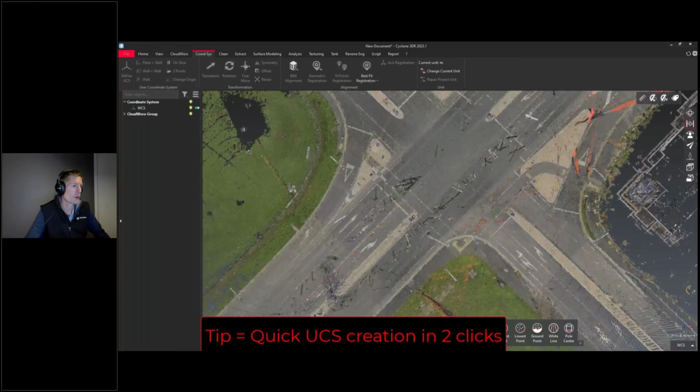Welcome in Cyclone 3DR environment, if you are not familiar. So here I'm working on a point cloud, that is from an LGS format. LGS is the Leica Geosystems point cloud format, really convenient to host a large amount of points, so you can work with a very heavy data set.

Immediately after the import of my point cloud, I always recommend to create a UCS. So here you have seen a 2-click, 2-point UCS creation. Even if later I decide to export my deliverable in another coordinate system, at least to work locally it's convenient. The next tip I recommend when I start a workflow is to create a limit box to focus on the area of interest. So here, this is the road intersection.

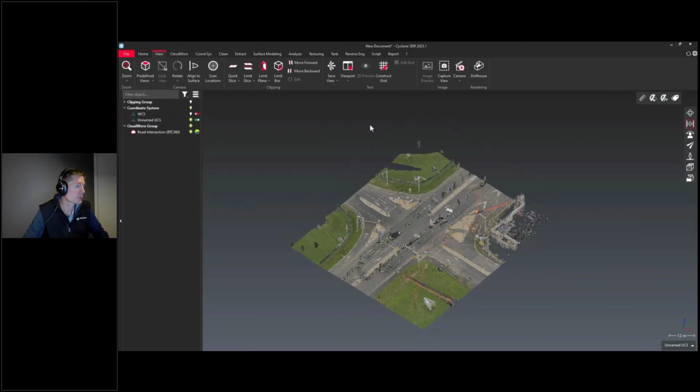It's also a recommended step to convert the large LGS point cloud into Cyclone 3DR point cloud structure. If you are familiar with Leica Geosystems environment, in the CloudWorks menu, I'm going to convert the projects. So here, for Virtual Surveyor, this is the feature that I will use. It's not mandatory to keep the entirety of the point cloud. In this example it really depends on the application, but to take my measures, my points directly on the point cloud, a 50 million point cloud was more than enough.

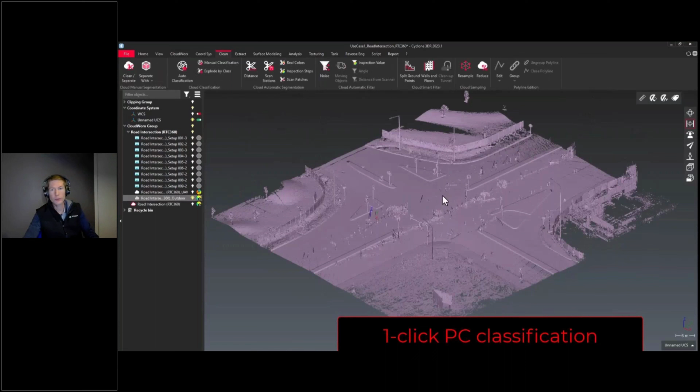Another important feature that I recommend to use for many applications, but in particular for Virtual Surveyor, is to use the one-click point cloud classification. The video is recorded, but what is important to know is that this operation to classify the point cloud remains a one-click operation. It might take a couple of hours to proceed, but it's a one-click operation and it's doable with a script.

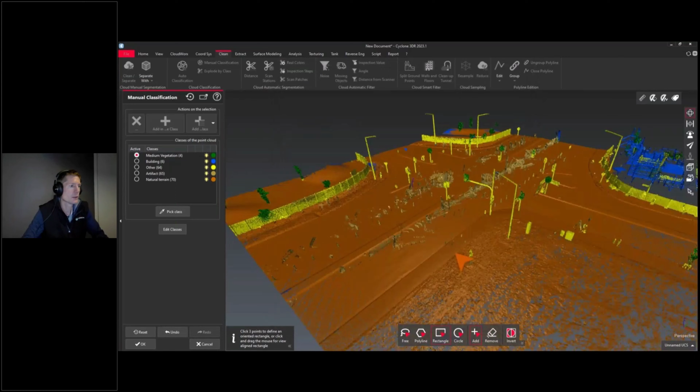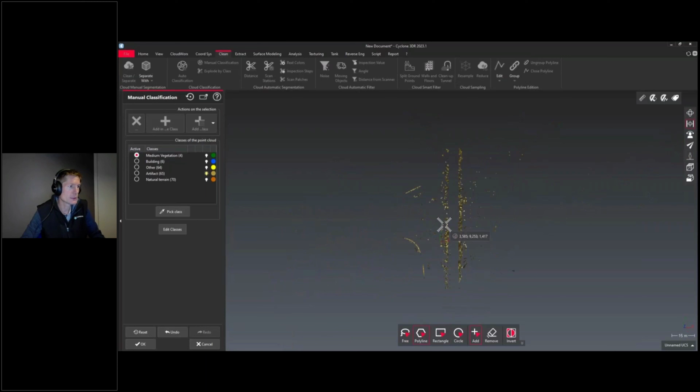Another strength of Cyclone 3DR is the capacity, in addition to finish the workflow after automatic tools, to work with manual user-friendly tools to finish the workflow. So here I just change the colors to have a better understanding of the context. If you are familiar with Cyclone 3DR manual tools, still manual but very appreciated and very popular among our community, the capacity to clean point cloud, just to select a group of points, clusters. It's very easy to rotate the scene, to define a fence, and just assign a new class.

In addition to the automatic classification, Cyclone 3DR is probably one of the single products in the market to also offer manual tools to deliver very refined deliverables. And here I have a very clean point cloud, clean and rich with the information of the classification.

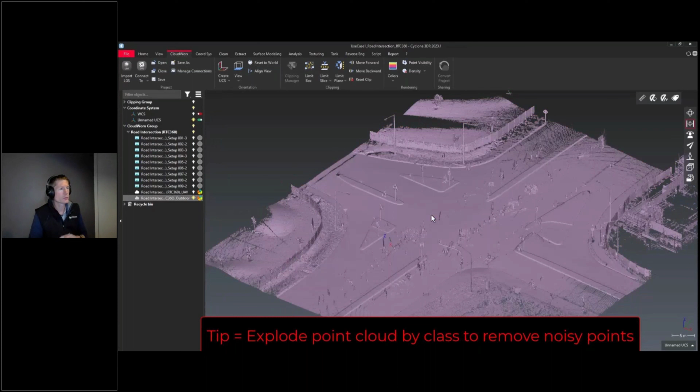To pursue the workflow, I also recommend to explode. It's another tip, to explode the point cloud by class. It's a way to remove in a very fast way the points that I don't want. So now I'm ready to work for my Virtual Surveyor operation. I don't have the noisy points, the moving objects. Also consider that classification, but also the capacity to explode and to remerge a point cloud removing some classes, is a feature that can be done in script.

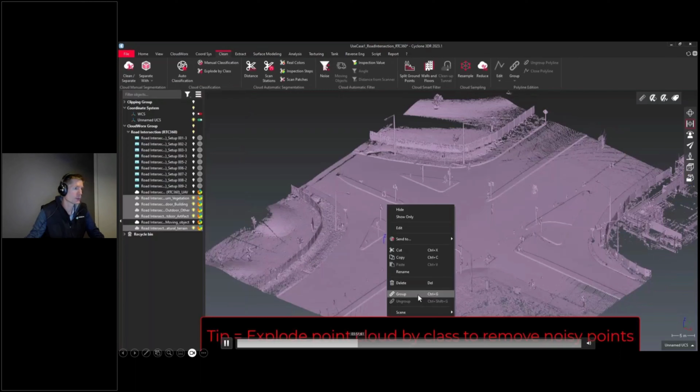And now in Virtual Surveyor, so I just started, let me just go back. So to start the Virtual Surveyor, I don't have to do a selection. I can work on any kind of data, mesh, point cloud, anything. So I just run Virtual Surveyor and I can work on my 3D environment.

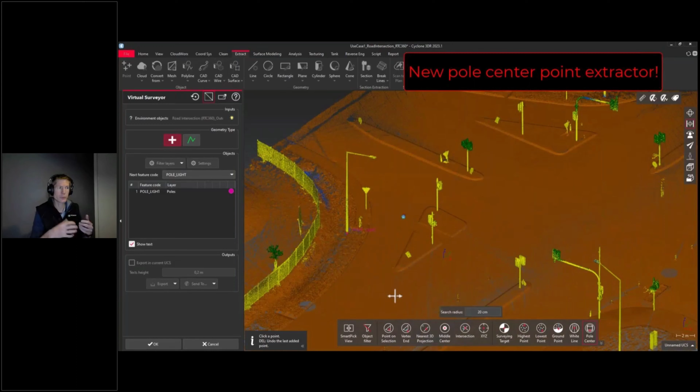First thing I would like to mention is the flexibility of the settings that we developed for our users. For example, if you have to create a road intersection plan for a specific municipality, you can load and prepare your own feature code standards. But if you have to do another job in another county, another city, another area, you can create different settings. So first thing to do is to prepare your settings.

And then what you can see here, this is a new feature. Among the point selection tools, the pole center is a feature. You just have to click in the middle of a pole to detect the middle projected on the DTM. This is really convenient, and which is nice, with this feature you don't have to be accurate when you click on the pole. Automatically, it detects the middle point projected on the ground.

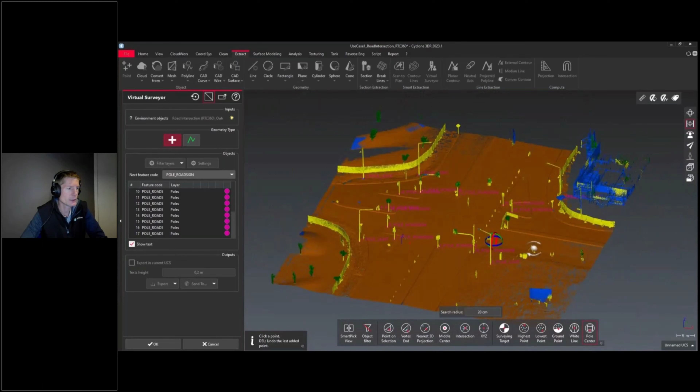And a funny story about this, this is feedback that Lennon shared with us when we shared a beta version of Virtual Surveyor earlier this year.

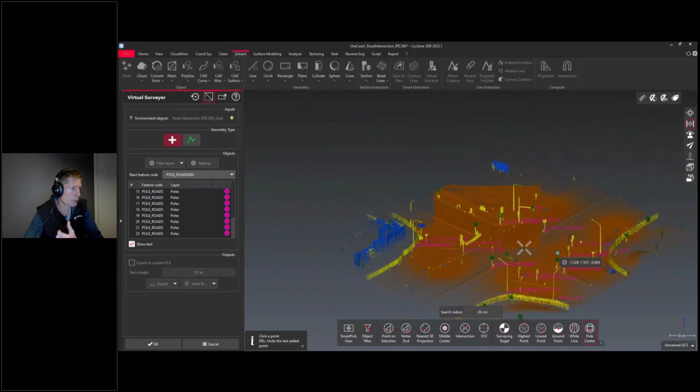That's a great tool. With my feature code, I can create points with feature code information, and I can decide to show or hide the text depending on the amount of information.

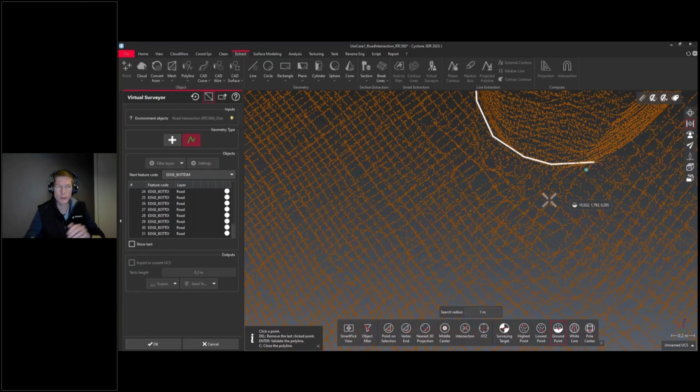In addition to the points, I can also create polylines directly in my 3D environment, and for each vertex, for each point, I'm able to extract a feature code.

This information at the end can be exported in proper layers in a DXF format, for example. So to extract the edge of this road, I can use multiple point selection, using pole center for the poles. Here I'm doing a demo with the ground point, which is projected on the DTM. Another solution is to use our lowest point capacity, which is really convenient for edges and to detect various borders.

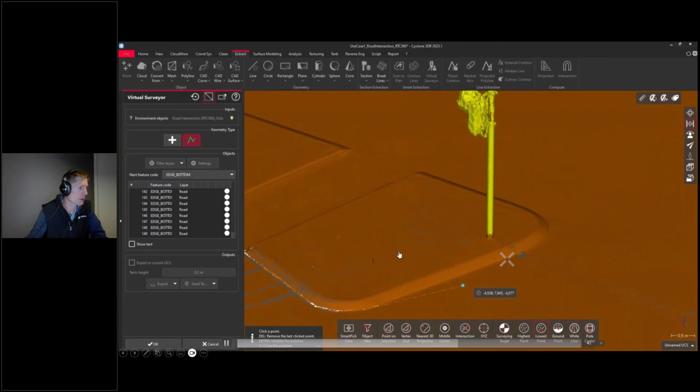You can see on the left part of the screen I have a complete project that is filled. It's possible later to change the colors, assign to a new layer, rename, or remove. There's also a copy-paste possibility that's not part of this demo.

It's possible to quit the workflow, save your project, and go back into your Virtual Surveyor project if you need to finish your job later.

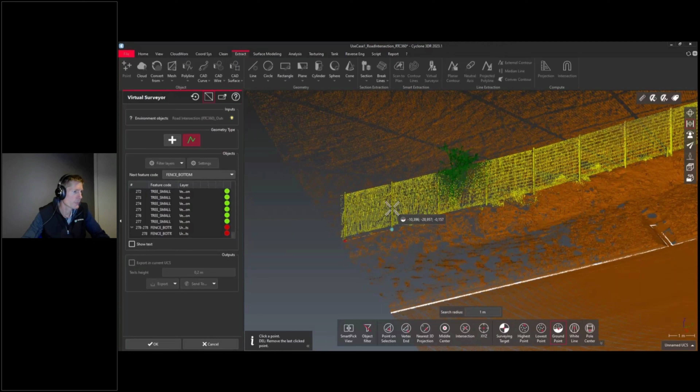This is another layer I'm building for my fence here, and you can see that the classification representation is really convenient to visualize each column of this fence. Very easy to have a feature code for each fence and a very detailed deliverable from it.

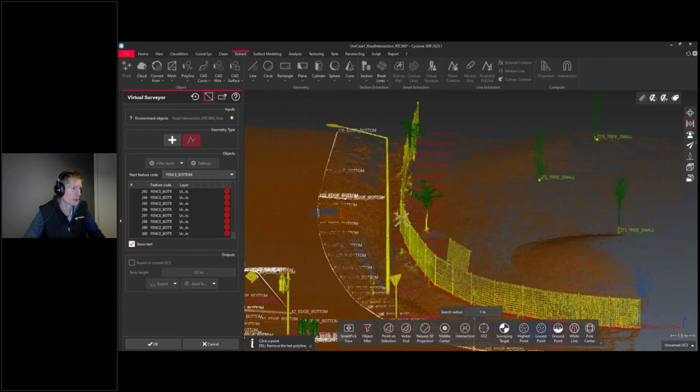My feeling is with the point cloud and representation of Cyclone 3DR, it's even better than real colors in this situation. So I mentioned that it's possible...

Yes, I'm just showing the work in progress. I extracted the poles, various lines. I can quit the command and decide to change the representation.

Maybe a little teaser for what's coming next year in Cyclone 3DR: in addition to the point cloud representation, Virtual Surveyor will be a good workflow to also use the images from the laser scanner.

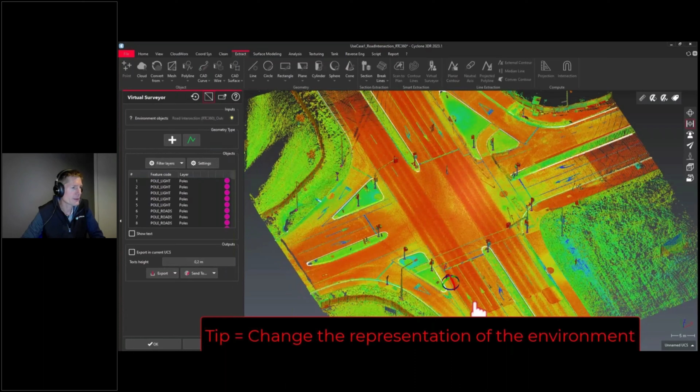Just a small teaser. I decided to switch the point cloud representation from classification to intensity to identify the various road marks on the road.

Here again, I can use points that are projected on the ground thanks to the ground point, or I can use the lowest point in this situation.

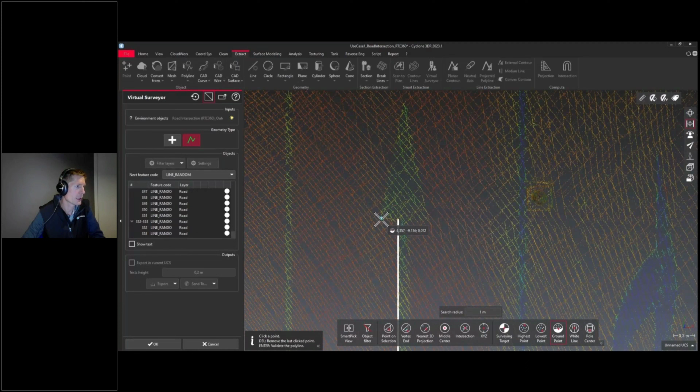Pretty easy thanks to the intensity value, and there's a shortcut with the keyboard, the letter C, to close the polyline in one click and save a little time.

So that was the example of the arrows, and for this triangle road sign, also very fast to extract with the shortcut we have in Cyclone 3DR.

I think my extraction is almost done. Maybe, okay, let's see a final extraction of furniture in the street.

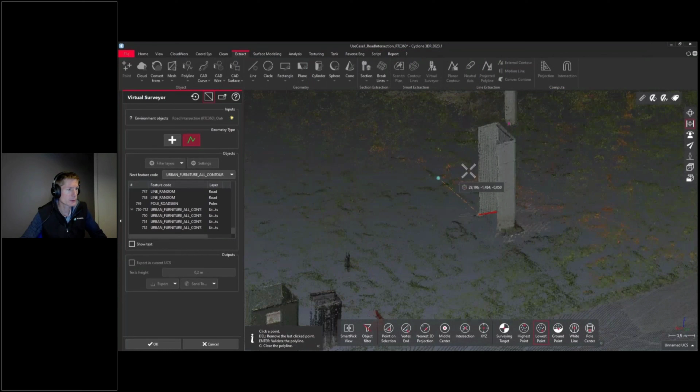It's really up to you - you can customize the settings to host as many and as various layers and kinds of information as possible, depending on your customers, the final company or engineering firm that will use the deliverable.

It can be, I mean, I got this map that I can export to DXF as an example. We also have a direct export to AutoCAD and to BricsCAD. Hexagon BricsCAD is also a CAD product from Hexagon.

So this is in BricsCAD, and here we are for the road intersection extraction, with all the information and the feature code that you can also export to a CSV list.

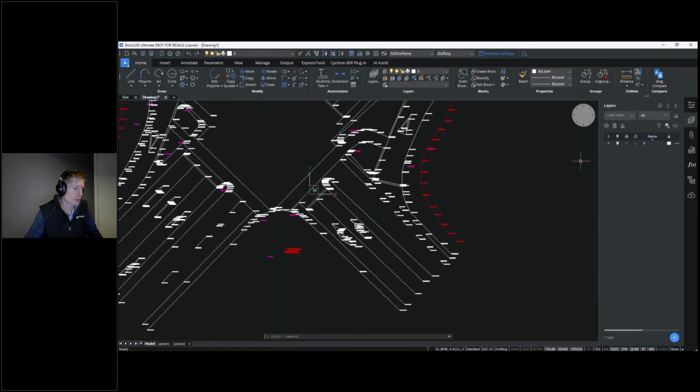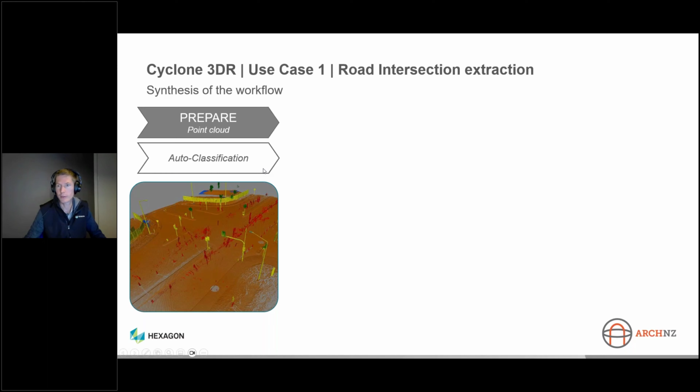So back to summarizing the workflow: I demonstrated a few tips, the automatic classification that can be done with a script, with no user interaction, which is really convenient and ideal to prepare your data and then execute your Virtual Surveyor operation.

This is a feature we released this year. At the end, you can deliver to many applications, and 12D is a CAD software application that can also be used to consume the deliverable from Cyclone 3DR.

Virtual Surveyor exposes various manual extraction features. I'd like to highlight more automated ways to extract operations - we have a predefined script in Cyclone 3DR, the kerb extraction, which I think is the most popular favorite script in Cyclone 3DR.

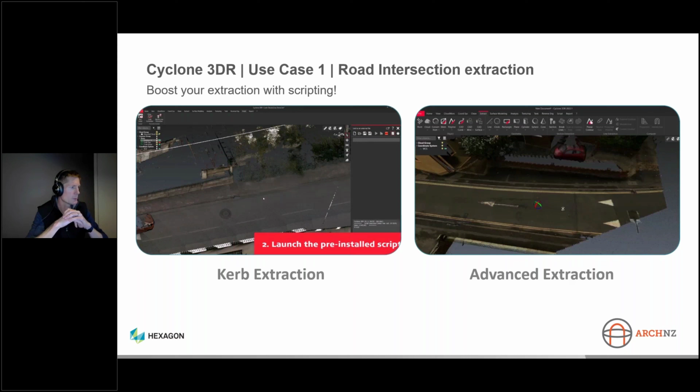So it's been part of Cyclone 3DR since the first release. I think this video is 4 years old, but still it's a very popular feature to extract edges. Please note that with our very recent script engine, the kerb extraction feature is now 20 times faster since April.

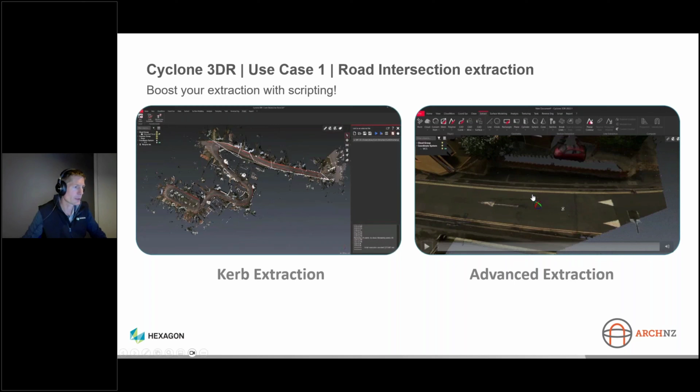Cyclone 3DR is an advanced solution with multiple ways to extract information. You can see in this video the capacity to filter the data with the RGB colors, to filter the data with intensity, use the inspection steps tool, the possibility to explode the data into clusters, and also use various tools like line extraction to detect the center line of road marks in this situation.

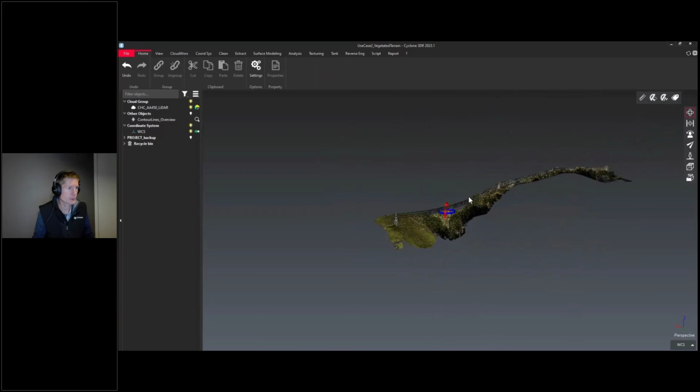With the point cloud coming from an aerial LiDAR scan - this is a dataset that Lennon gave me, and I really had fun, so thank you Lennon - I will start this workflow with a DTM. Maybe not the most important part of what I would like to do for this workflow, but still, I think it's always good to test the DTM feature in Cyclone 3DR for an outdoor application.

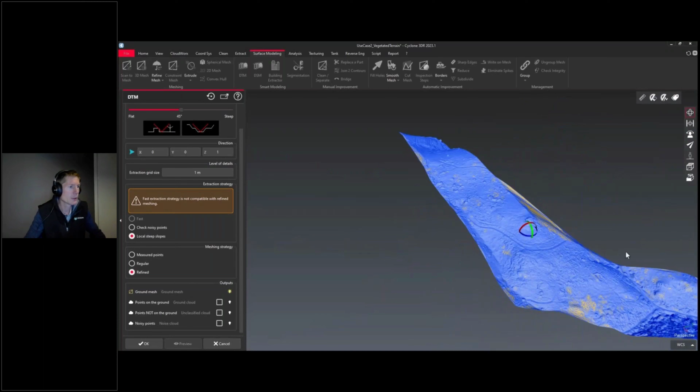As you can see, it's pretty easy to use. I just kept the default parameters and adjusted the size of the grid by 1 meter - this is basically the resolution of my surface model. And my terrain model now, you can see the time of computation is live here for the DTM. So it's very fast and very easy to process, even for reality capture beginners.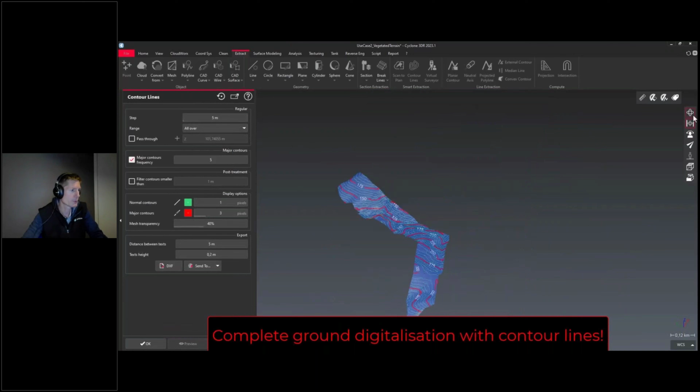Another very important piece of information that you can extract from an outdoor dataset and from a DTM are the contour lines. Again, contour lines is also a very simple feature to use. Based on the DTM, I kept my parameters and already extracted contour lines - it's automatic and very fast to extract. Just adjusting some parameters to have the good step for my final deliverable. Here I'm satisfied. I would like to highlight that DTM contour lines are very easy to proceed and a good way to understand the context.

Let's get back to the point cloud. Here you can see I have electric lines, and I would like to do a clearance verification. First of all, I will use our favorite script for line extraction, which is part of the product. So I need my point cloud - I changed the representation just for the purpose of visualization. This is a predefined script, and it's up to you if you want to adjust some parameter.

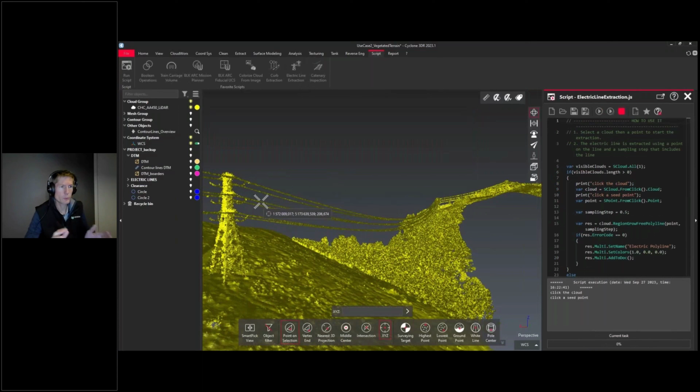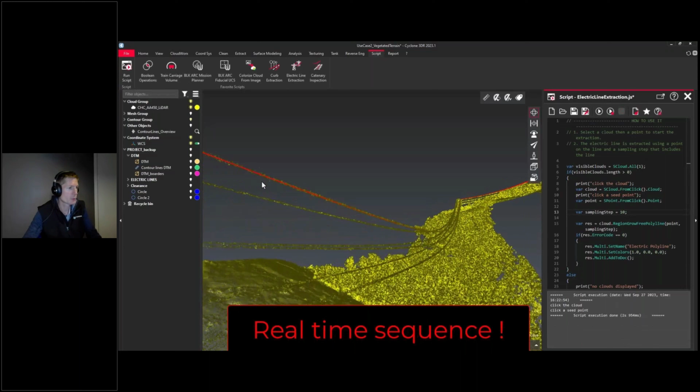One tip: if you need to go into this script, this is the only parameter you may want to change - basically the step of the polylines that I will extract. One click to select my point cloud, one click to have a seed point to extract my polyline, and I'm just repeating the task for the six lines. It's real time, efficient, and reliable - that's a script we are proud of, and you can see that the extraction of the 6 electric lines is so easy.

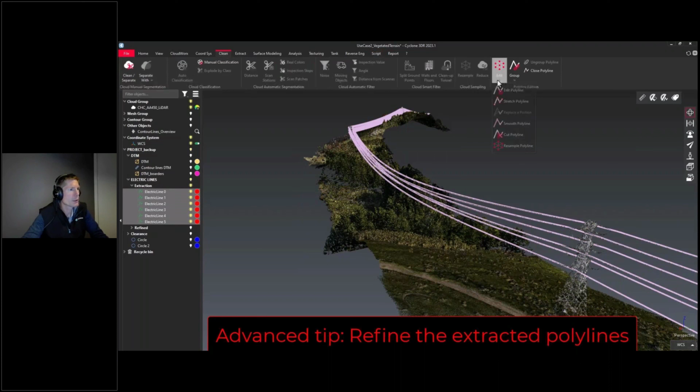To go further, maybe a couple of features I'd like to show. First, you can see I can change the visibility settings of my polylines, using features like resampling polyline and smoothing to get the most realistic lines from my first extraction. It's not mandatory for this workflow, but it's a bonus way to get the most realistic electric lines.

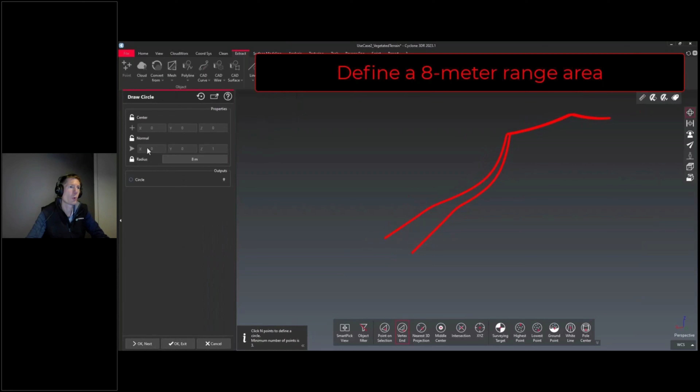Now that I've done this extraction, I'm focusing on the 2 bottom ones, the ones close to the vegetation. So first, to create my 8-meter clearance area, I'm just creating a circle, thanks to the modeling tool of Cyclone 3DR, at the beginning of the first polyline, pointing the center, a direction, and repeating the task for the second line. Then we have extrude along a path.

This creates a mesh, an object along a path, in this case one of the 2 electric lines. I can also close the objects. So here I extracted, and now I have a volume, and I want to check inside this volume where the vegetation, the trees that impact my clearance control, are.

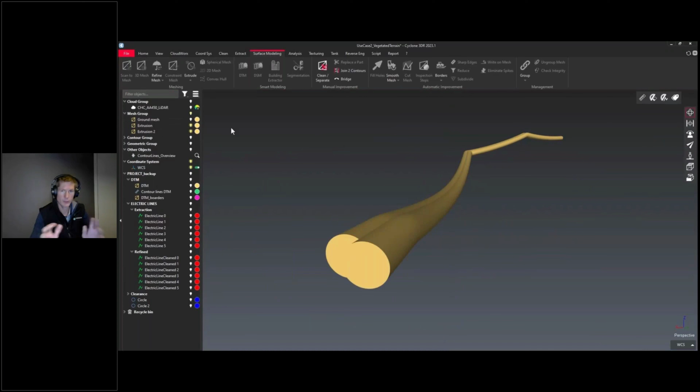Before that, I just have to merge the two volumes, and for that we have another Boolean operation script, which is also very fast to use. Just selecting the 2 meshes, and choosing the strategy to merge the 2 volumes together.

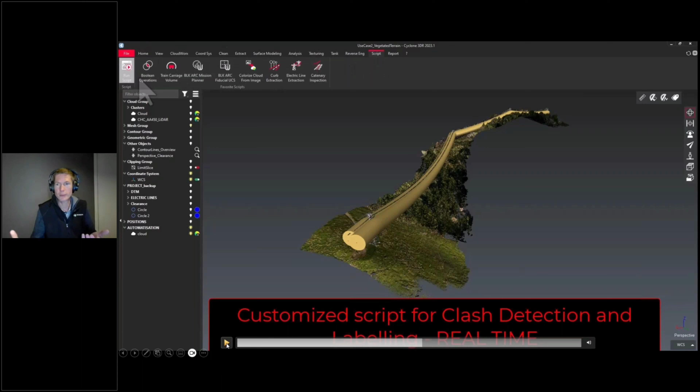Now I'm ready to do the clearance verification with Python code, and here I'll just make a pause. You're going to see in 20 seconds the results of a script, which I'll describe after the demo, to really show you that you can create your own script to save time and get robust results for your repetitive tasks.

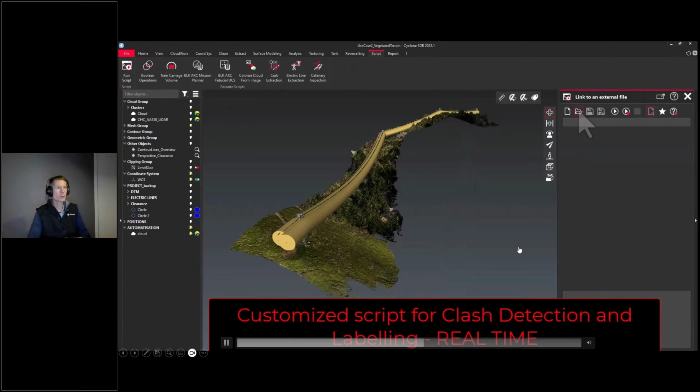So I created this JavaScript file. I just have to connect, and I'm playing it. What I'm doing takes 2 seconds to keep only the points inside my volume, and the support of the point cloud is split into clusters. For each cluster, I was able to get a coordinate label XY in this case, but I could also add the altitude.

Everything happened in 5 seconds with the script. This is what is magic about scripts. Just to show you a piece of what you can do, but you can even do more.

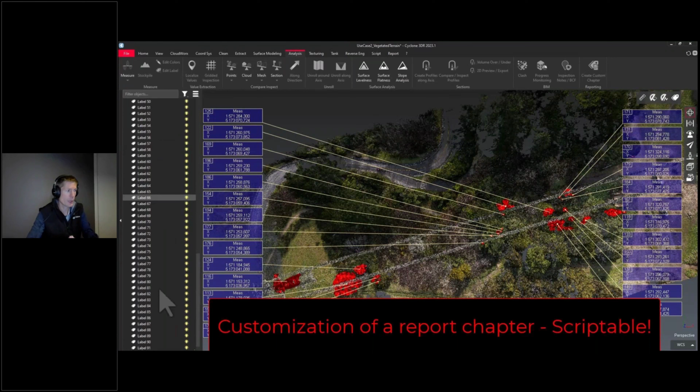Here, what I'm doing is creating a customized report chapter. In this report chapter, I'll have all the coordinate information for each of the clusters. I can also decide to create various view sets to enrich my reports. The purpose is to get, in this case, a PDF report I can share with my customer, the owner of my electric network.

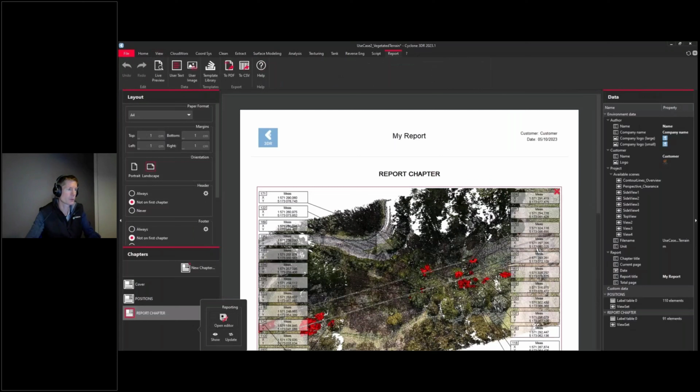This reporting part, the creation of a report chapter, the collection of view sets, and gathering all the values to PDF or CSV can also be done in script. But here I'm showing this in the Cyclone 3DR user interface, and it's pretty easy to add the view set I created. You can customize the background, the scale, etc.

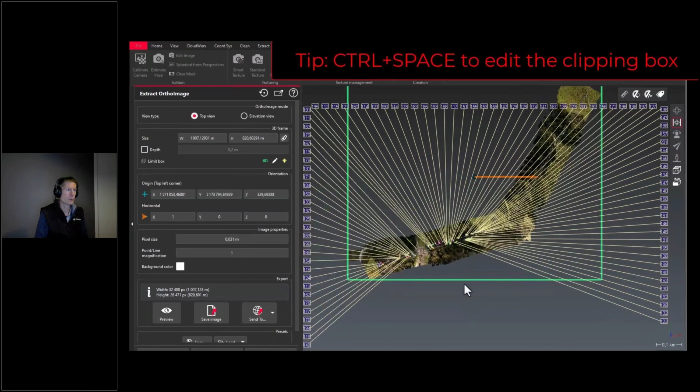Another way to deliver this information to the end user is to use ortho images, and this is what I'm going to do here, using the extract ortho image tool. So I have my top view representation with my clusters, the XY labels for each cluster. Then I just have to define an area of interest. There are parameters to adjust the number of pixels, the size, the background.

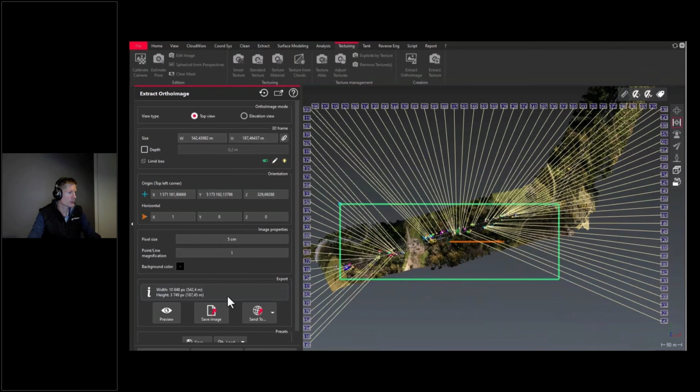You can also load this kind of settings, saving and loading your own settings. So in addition to the PDF or CSV exports, another kind of deliverable really useful for this application is to get an ortho image with all the labels, the X and Y coordinates of each cluster.

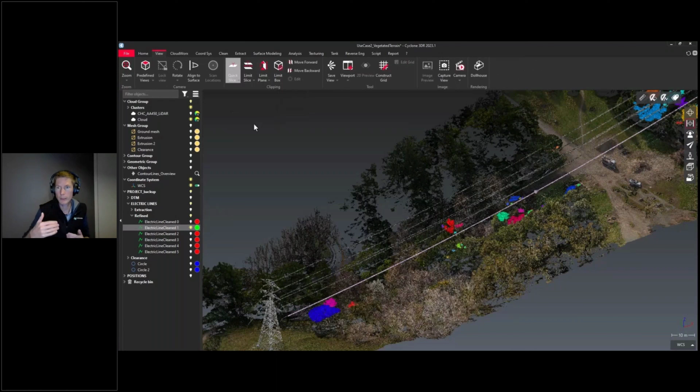A final tip, another way to understand the context here. I'm selecting one polyline, and from it, creating a slice along this polyline. What I'd like to do is review my vegetation clearance along this path. So I created this slice, and I can also edit it, renaming it, editing its depth and the step.

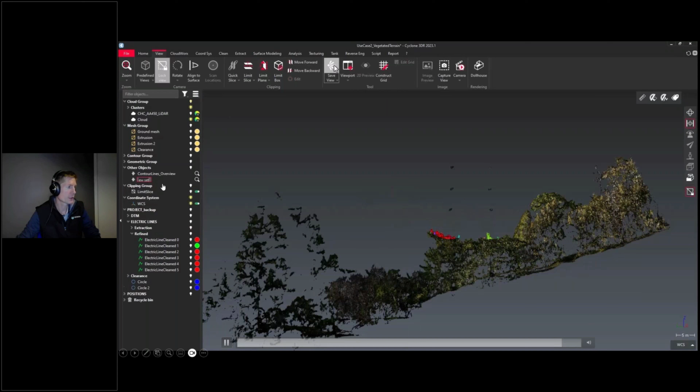Because it will be possible for me to visualize along this slice, and with the recent small improvements we released, it's really convenient. So I'm selecting the slice, using the lock view feature, a tip to lock the view along this slice, and using the Control plus Scroll shortcut while maintaining the selection of the limit slice, I can go along my axis, my path, and visualize and see where the issues are.

I can then create more view sets. I could also add and keep some label information to make my report even more complete. And then I generated this PDF, and coordinates can also be exported to CSV.

So a short summary of the workflow. DTM, contour lines - for me those are basic tools for survey outdoor application of Cyclone 3DR. Very easy to use, easy to understand the reality, and it will be used again in the next workflow.

Then for this advanced extraction, I did a kind of clash detection operation that I'm going to describe in detail. Finally, I was able to export in various ways the information about where are the clusters, where are the locations of the impact of the trees with this electric line. Really convenient for the maintenance of power lines. So I can export to ortho image, but also I can create PDF reports, CSV tables.

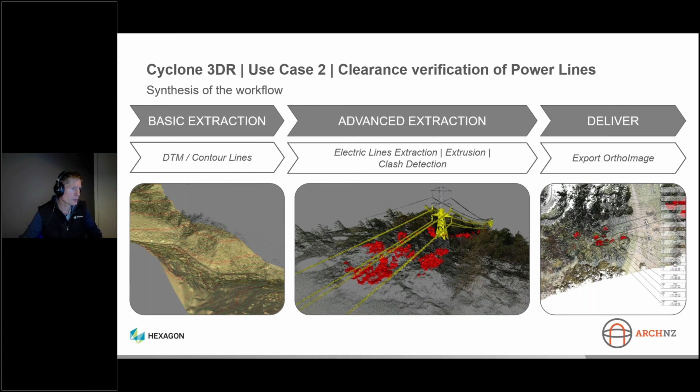So let's jump into the clash detection script that I created. My goal here is to show you that even someone who is not a software developer or who doesn't have computer skills can do very nice stuff. And this is the guy I am.

So we have - and I will point to this page again at the end - a very nice documentation. It is online, it is public, describing the API of Cyclone 3DR scripting. This is where you can find all the information.

So to start this piece of script, I used this iCloud.separatePoly function. Everything is described in the API documentation with examples - what are the inputs, what kind of outputs are returned from this function.

My goal here is to split and to detect the points that are inside the clearance area, so to split the point cloud into parts, with a mesh as a reference. This is a function that I will execute at the end of my script.

So I picked from the documentation this existing function, and I just have to set a name for my output, to add it to the document, the 3DR project, and just keep but hide my input mesh and my input point cloud. So this is the first step of the clash detection script.

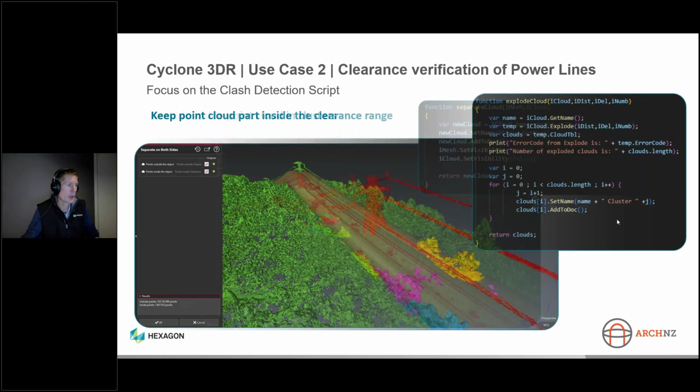And then the next step, I want to create clusters from it. So this is the explode iCloud.explode function that I found in the documentation. I just have to provide a cloud as an input, and then some parameters like the distance between two clusters, and the maximum number of clusters - I did just one test, but 200 was good enough for this use case.

And then the last step of this script is to extract for each cluster the label, the X and Y coordinates of the centroid of each cluster. So the get bounding box feature is exposed in the script API.

Actually, this is not a feature that is part of Cyclone3DR user interface, but you can get this conceptual object for any kind of object in Cyclone3DR thanks to scripting. And then it's a basic mathematical operation to get the centroid. So this is the extraction part of the centroid.

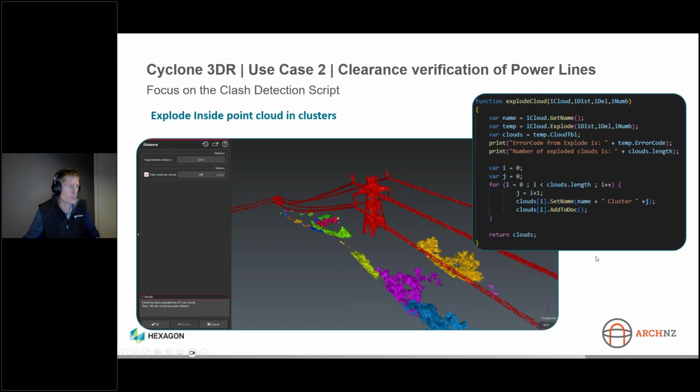Just to show you that I didn't build the perfect script here - that was not the purpose. My purpose is to save time when I repeat tasks. So I did this line to just hide, to remove the biggest point cloud before the extraction of all the centroids and the coordinates.

A software developer, someone with computer science skills, could do better. But really, here I want to point out that you don't have to deliver the perfect script, and it can be a tool that you can be familiar with, that you can reuse for your tasks. For me, that was more than okay to get my deliverable.

And if I have to do it again, maybe it will be okay - I know I created the script, and maybe I can also add instructions in my script as well, if one of my colleagues wants to use it.

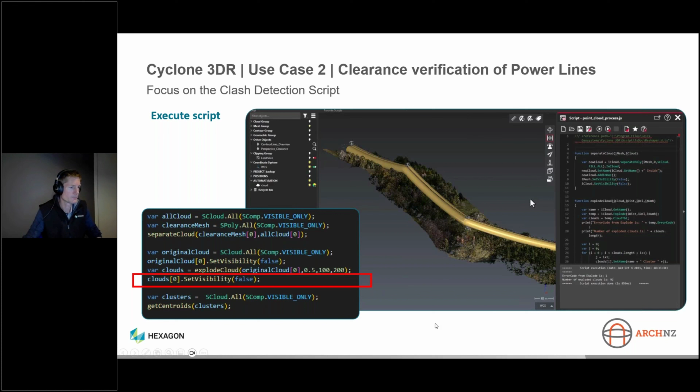Okay, let's jump into the final use case: monitoring a civil construction site. This is another dataset that Lennon shared with me from photogrammetry, and again I'm starting this workflow with a DTM, just having an overview of this point cloud.

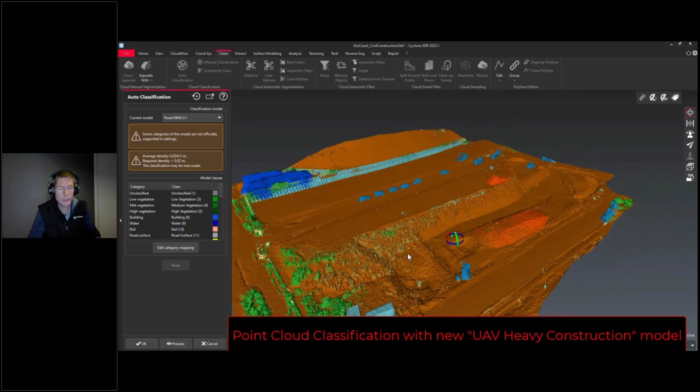But before executing a DTM, what I'm doing is a classification. We have four models: outdoor generic, indoor generic, construction sites, and heavy construction, trained with UAV dataset. So this is the one that I'm using.

Here, using the capacity to explode a point cloud by class, it's an easy way for me to remove parts I don't want, like buildings, vehicles, for example, and to keep only the natural components of this point cloud, to be able later in my DTM to use more advanced parameters.

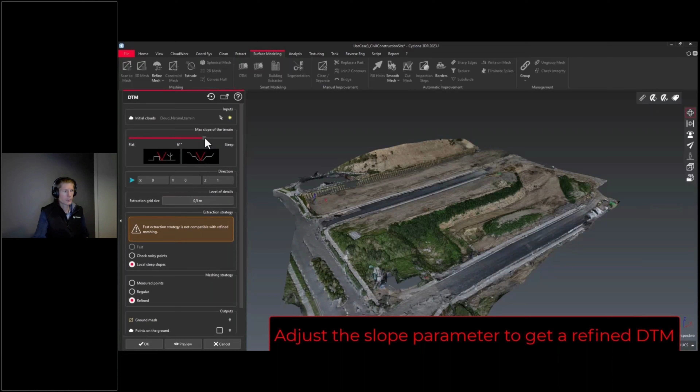It's a way to get the most refined DTM. I could also use meshing features, but this one I think is a modern and easy way to get a refined DTM with classification. You don't have to jump into too complex parameters in meshing, but it's a very good way, so I can be optimistic in my slope parameter here to get a refined, realistic DTM.

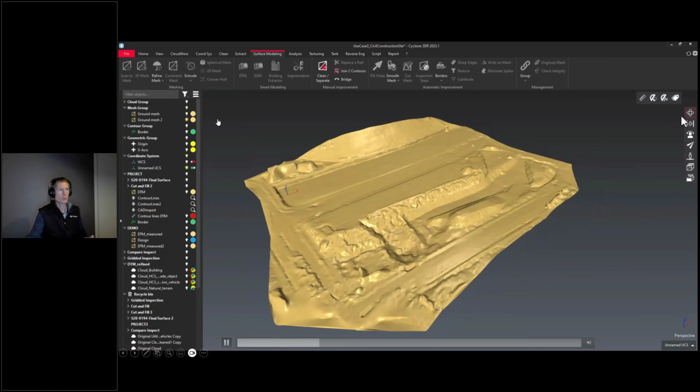So here I'm going to point on this area. This is the edge of the terrain that is maintained in my DTM operation. I use the classification to get this level of detail.

So I imported the design of my work site. I didn't like it in green, so I decided to change it to a transparent blue one, just to show you that any kind of object you can play with the representation for your own convenience.

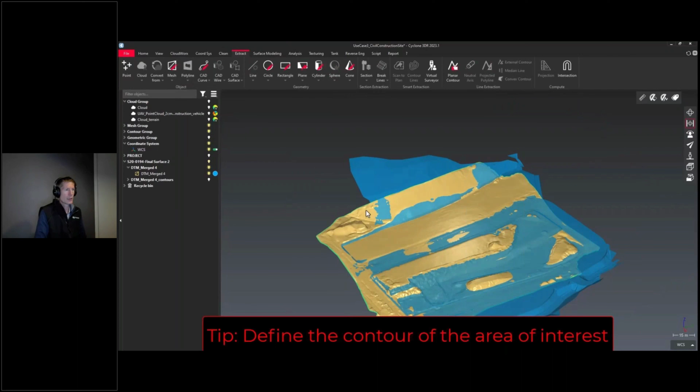And now I'm going to do a cut and fill operation, but prior to this I'd like to just have a contour. I'm extracting a contour of my DTM to really focus on the area of interest.

So I can use the Cyclone 3DR meshing advanced tool to keep only the area of interest, and I'll keep this part of the design model, my mesh.

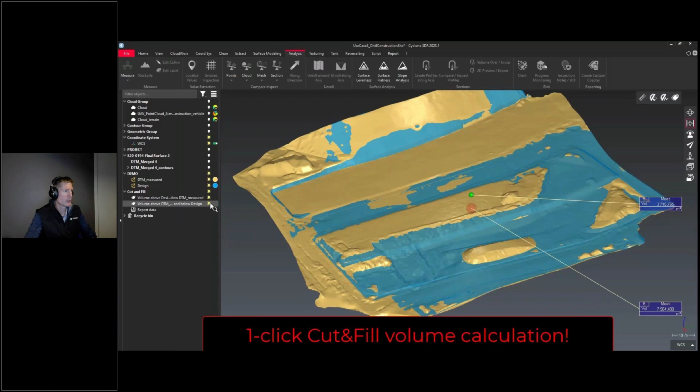So it's going fast. Cut and fill, you can see it's going very fast. I just select the design, the measured model, and it's a one-click operation to get the over/under volumes. And that's it. And I have a report that's automatically filled.

I will come back to that, but before watching the reports, I can also bring more context with the creation of a color map, using the comparison between the two meshes.

Here we have predefined color gradients, so I can really visualize the over/under parts between the situation of the work site, my DTM, and the target, the design target. This is a CAD model.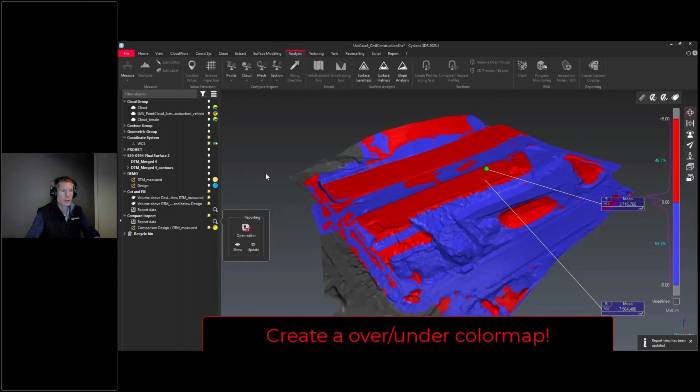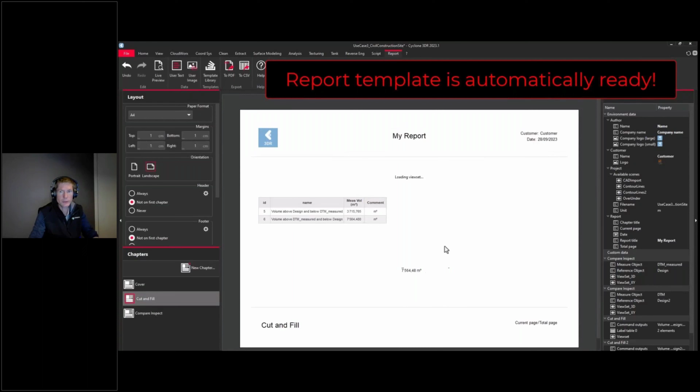I can show again the volumes, update my view sets, and now jump into the report editor. This is typical for Cyclone 3DR analysis features. Automatically the report chapters are filled, and then you can customize, change your own template as well, but it's very fast.

I'd also like to show you graded inspection. This is another way to deliver information and values from an inspection. It works on inspected surfaces, like this colorized color map.

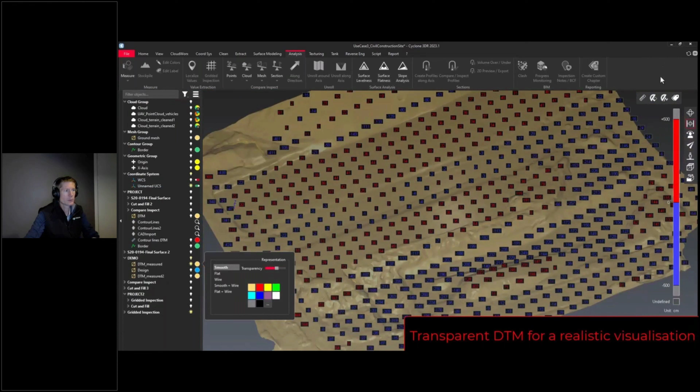I'm just changing some parameters. So on a grid, I can get the difference, the deviation between the reality, the DTM, and the CAD. I define the step, those are values in centimeters, but this is another way to understand the context — okay, here I have 2 meters to fill, etc.

Just before that, this grid can also be exported to DXF with the colors, and also sent to AutoCAD. And the final part of this use case is the creation of a raster.

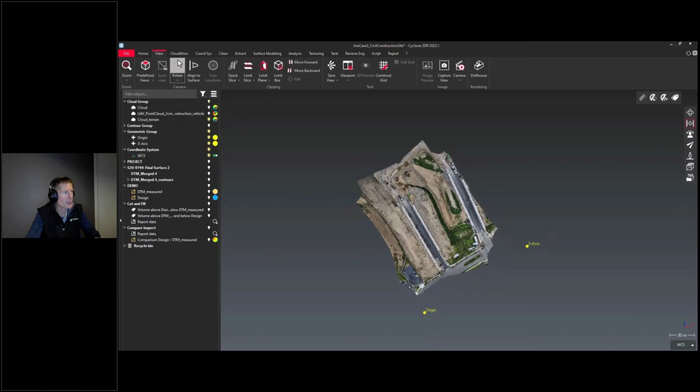It can work on a point cloud or on a mesh. This is another one that was really pushed by Lennon, and I'm really happy to say that we released this script on our GitHub three weeks ago. If you're a Cyclone 3DR user, it's public, it's free, and now on GitHub.

The purpose is to get a raster to a CSV format or ASCII format off a point cloud, with altitude information, and we have various options, including the lowest point or the highest point.

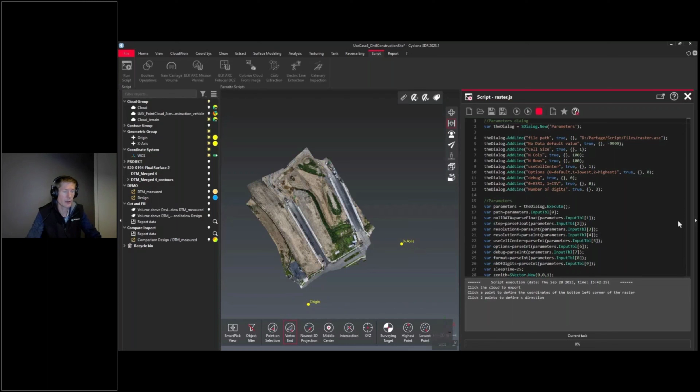I prepared an origin and axis for the purpose of the demo, but it's not mandatory. From this raster script, now on GitHub, you can see that I extracted this CSV spreadsheet with the altitude of my terrain, arranged in columns and rows.

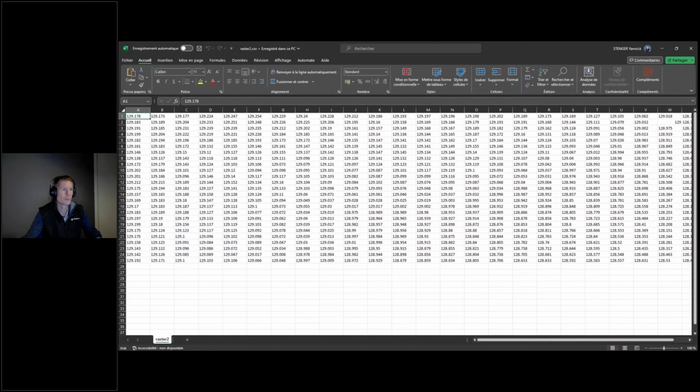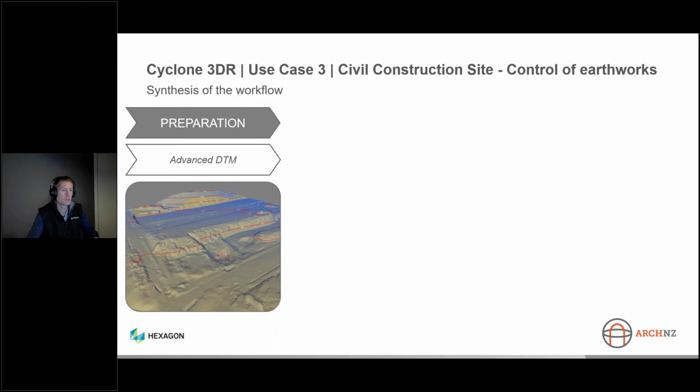So let me summarize this final use case. DTM, very important for many outdoor workflows, and advanced DTM, multiple ways. I think we have a very good one on our YouTube channel that I encourage you to watch. For this one, I used the classification to clean very easily the data, the noisy points, or at least the non-natural ones, to get the most refined model in a very easy way.

And then the cut and fill operation, very easy, very fast as well. The video was fast, but it was a real-time extraction. The difference of calculation between the two surfaces is a very fast operation in Cyclone 3DR.

And then another way to get the most of your reality capture data, it's now the new raster export script that is online on GitHub.

So before concluding and eventually replying to various questions, I would like to remind you of the updates about scripting. I mentioned this earlier, that in the April release, we delivered a new engine. Maybe this is not a lot for you, users of our products, but that was a big effort to modernize it. One of the very nice benefits is the acceleration.

It really depends. The comparison with before depends on how the script is built. But as an example, the script of the curb extraction is 20 times faster. So I encourage you to test it.

And the documentation is modernized, easy to use. You find all these kinds of links. Maybe we can share them with you later after the webinar. On the official site of Cyclone 3DR, you can find also this documentation. There is a link from the Help Documentation Center, so easy to find.

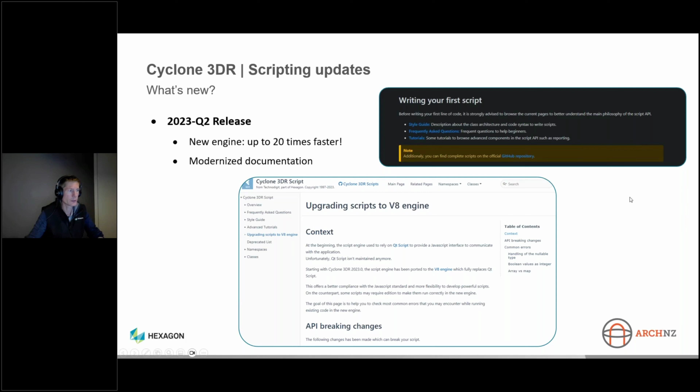More recently, we have been very active on socials. I don't want to talk only about my LinkedIn posts, but you can have a look and you will find very interesting information. We released a new YouTube playlist dedicated to scripting, so there are nice use cases. Have a look, please, if you are interested.

The GitHub page that is free and public was enriched with the raster, but also a nurbs embedment script that we created earlier this year. You can find also some articles, other use cases and latest updates, and also an interview with a partner from Canada that created nice scripts for his customers in North America. Please have a look.

And also about what's coming next for the scripting ecosystem. This is a very cool improvement: it will be possible to create your own dialogue from scripts.

Maybe if you are behind the code, that is not what is important for you, but for the end users that will use the scripts, for your colleagues, it will be much more user friendly. For the ones who will do the code, it's pretty easy to do. It's a new feature, very well documented. There are many various features that you can add: images, various choices, tooltips. I created this one myself, and I'm not a software developer, so it works very nicely.

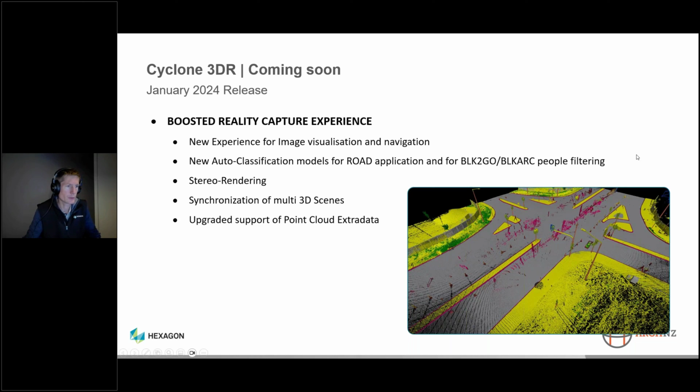In addition to the generic improvements for 3DR, I'd like to focus on various industry features. For the survey application, we have a big modernization of the experience to extract profiles and analyze them for road and tunnel applications, with a guided workflow to make it more user-friendly and get rid of known issues. It's a very modernized experience, and a nice feature is the capacity to import trajectories from Leica sensors like TRK and BLK.

For TRK, in addition to the new object trajectory, there are about 10 new script functions. It will be possible to do automated extraction of large datasets on LGS point clouds with scripts, making this kind of workflow even more powerful.

A quick word for the AEC industry. This is a permanent improvement area, and we're doing our best to make Cyclone 3DR more and more BIM friendly. Progress monitoring, released last year, is improved with more detailed screenshots for each object in the reports. The purpose of progress monitoring is to create a progress status report, not deviation analysis, but really to compare an IFC and a scan and track the progress of a project, including classification information.

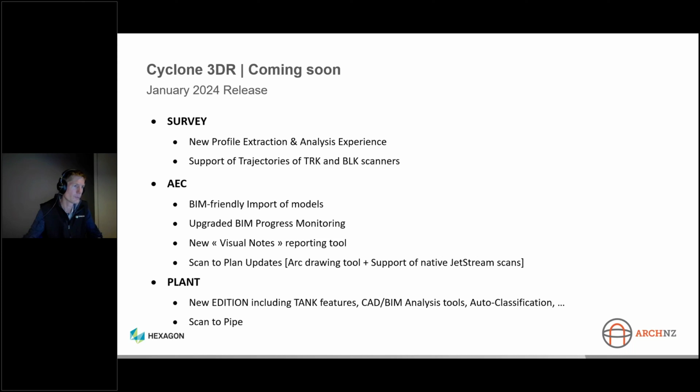And here is just a teaser of the work in progress.

Thank you very much for your attention. It was a pleasure. So, let's get back to you, Lennon.